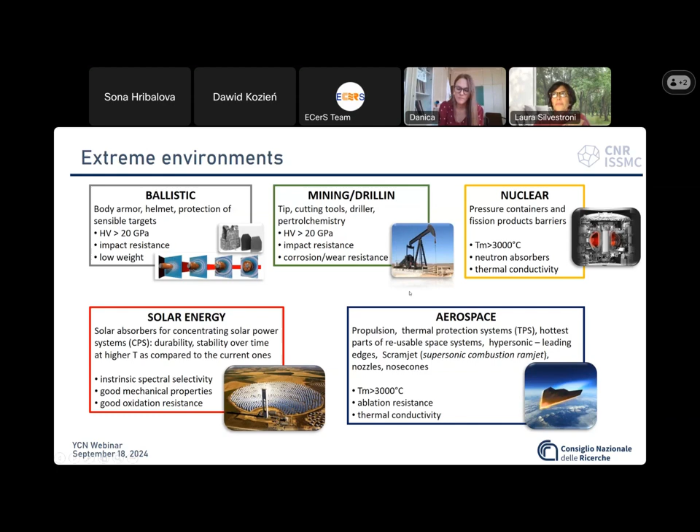In material science, a detailed study of the microstructural characteristics from the micro down to the nanoscale level is fundamental for identifying particular features deriving from processing, which are responsible for the specific thermomechanical behavior we will see in the final component.

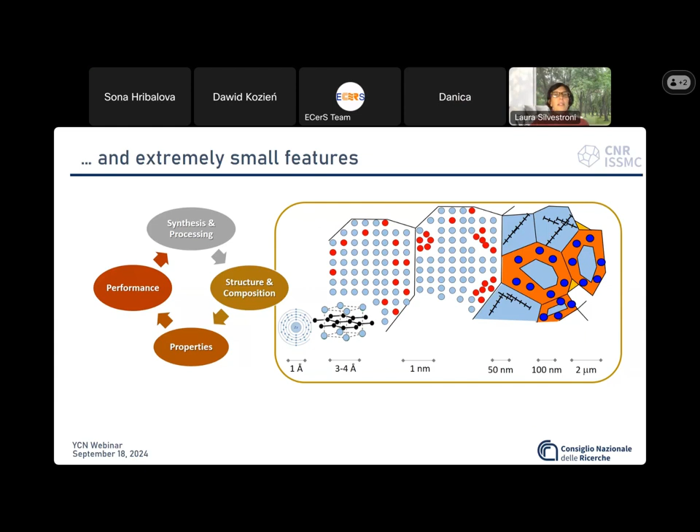Only with an overall understanding of the microstructural evolution and behavior under extreme environment can we take corrective actions and progressively ameliorate material performance beyond the current state of the art.

Today I will present some materials, narrowing down to the severe environment connected to aerospace. The family of materials known as ultra-high temperature ceramics, UHTC, is the most suitable candidate.

Starting with densification: borides and carbides have strong covalent bonds, and therefore require sintering temperatures above 2000 degrees C, application of mechanical pressure, and even current.

It is difficult to densify such pure borides and carbides without any sintering additive and control the microstructure so as to obtain good performance. Furthermore, it is difficult to machine such strong materials.

During my master's and PhD, I worked on borides and carbides with addition of molybdenum disilicide. At the beginning I started with hafnium diboride, then by mistake I took the wrong tap and opened the family to zirconium diboride, zirconium carbide, and hafnium carbide. So sometimes a mistake just broadens your work plan.

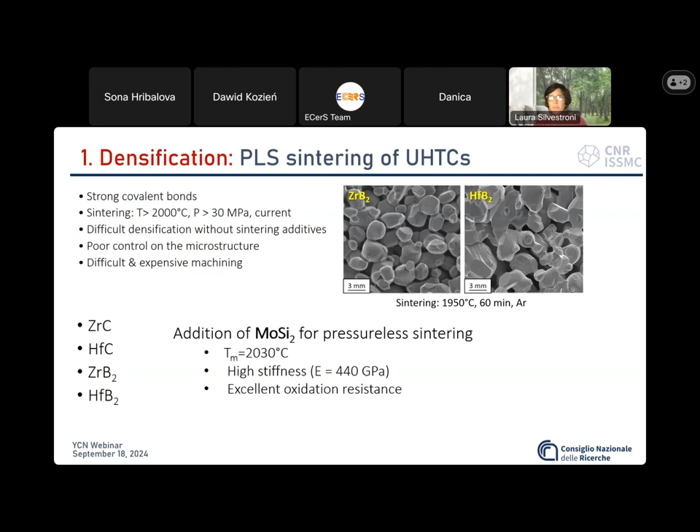So why did we add molybdenum disilicide? Our goal was to enable densification without application of pressure, so that we could produce near-net shaped components by pressureless sintering. Molybdenum disilicide has a high melting point, high stiffness, and excellent oxidation resistance.

These are examples of the microstructures of zirconium carbide or hafnium carbide with molybdenum disilicide that were sintered in flowing argon at 1950 degrees C, and we performed a very thorough microstructural characterization.

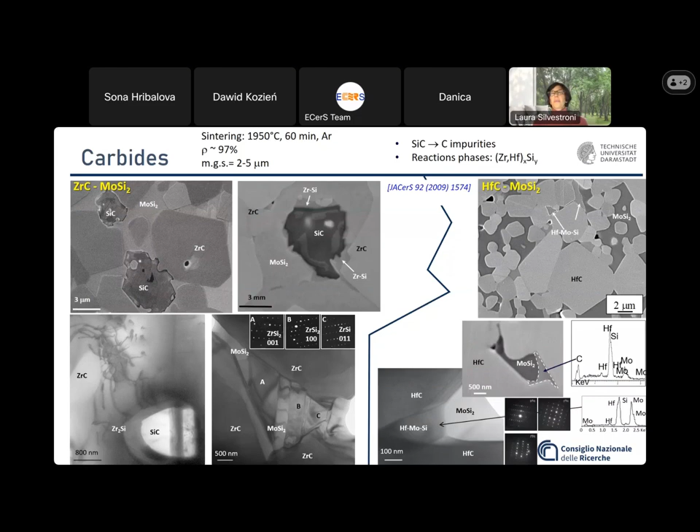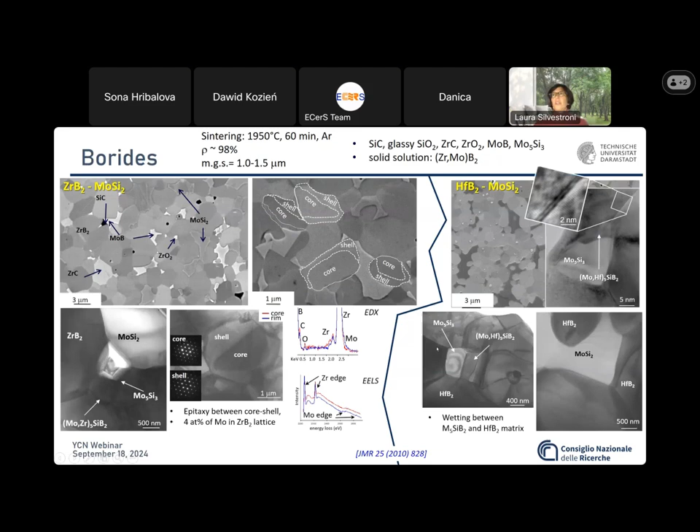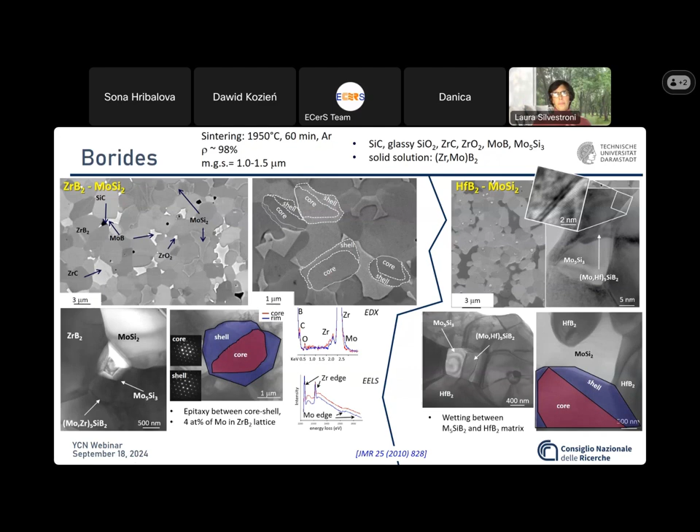We did the same on the borides, and here for the first time we identified a core-shell structure, a particular morphology of the grains, where the core is the original boride, zirconium diboride, and the shell is a solid solution that grows around the core and contains the additional element we added with the sintering additive, molybdenum in this case.

So to promote densification, the baseline is to use fine starting particles, not too fine because otherwise we introduce too much oxygen, but not too coarse so that matter transfer mechanisms are enhanced.

Using the strategy of the transient liquid phase is a good option because at sintering temperature we have a liquid phase that cleans the surface oxide, which hinders densification of borides and carbides, and acts as a grain lubricant. Having poor wettability of the transient liquid phase toward the matrix is also desired because it helps grain rearrangement, but it leaves clean grain boundaries and doesn't negatively impact mechanical properties at high temperature.

Our selection fell on molybdenum disilicide because it has a brittle-to-ductile transition, which is ductile and fills the voids due to its plasticity, and it also has some solubility within the matrix, so that we could form core-shell structures and hierarchical microstructure, which you will see in the next slides.

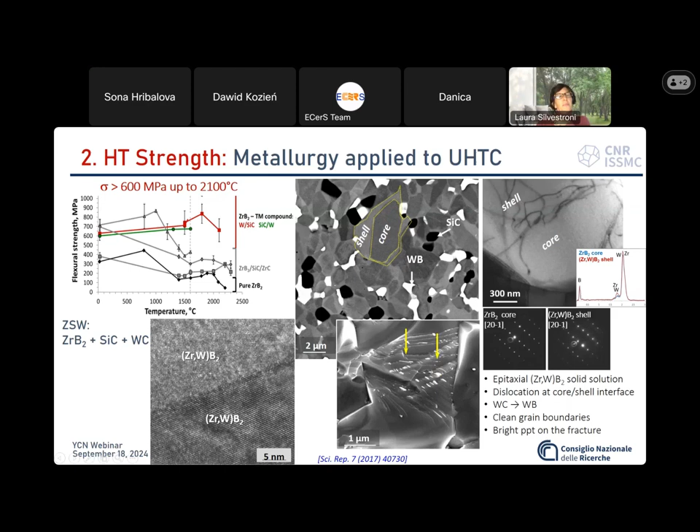To get further into this, I did some TEM analysis on the broken bars from the high temperature strength test, and you can see intense dislocation activity in the boride grains that formed real tangles of dislocations. These intersect and interact with each other, forming polygonized dislocation walls, which actually led to grain refinement from the original micron size down to the nanoscale.

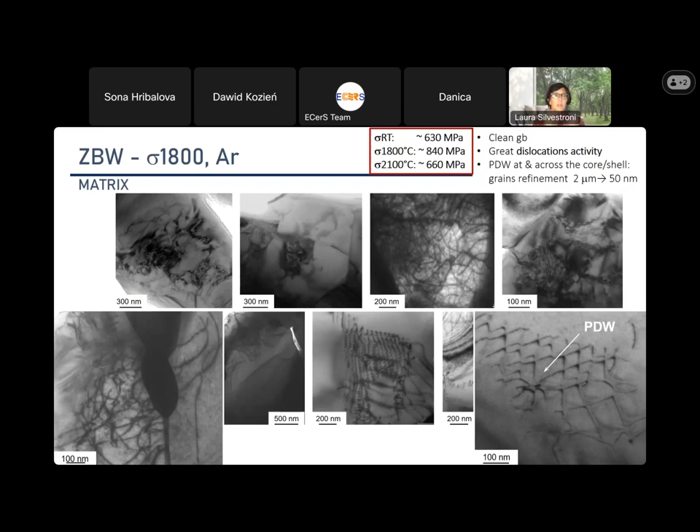Then I checked the second phases, and both silicon carbide and tungsten carbide displayed stacking faults, which are beneficial for crack deflection.

If you look at these silicon carbide particles, you can see that when the crack crosses the line defects, crack deviation occurs, whereas when the crack meets the defect along its longitudinal direction, it proceeds straight without any deflection.

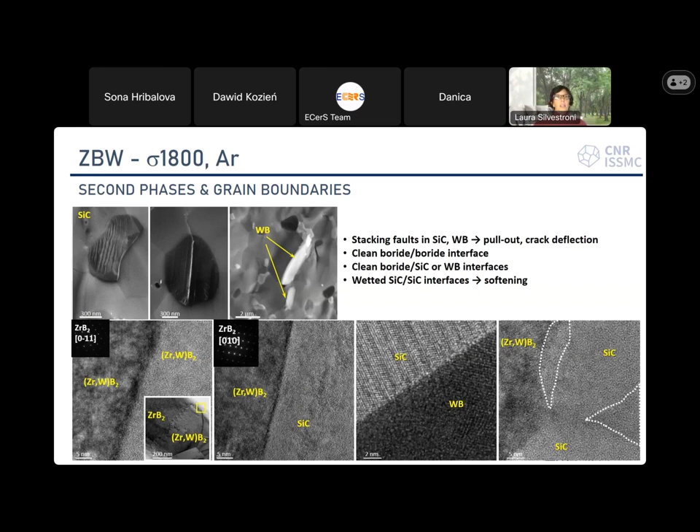The grain junctions remained clean, like in the as-sintered material, except when we had two adjacent silicon carbide grains in this region, where we observed some glass between the two. So the choice of adding just a little bit of silicon carbide was good in avoiding creep at high temperature.

I went back to the microscope, this time on an annealed sample of the same composition, but just thermally treated to boost the phenomena that were slightly highlighted in the sintered material, and to better evidence what was responsible.

On the polished surface, we found that the core shell was preserved, but just the core was reduced and the shell region was enlarged. There was coalescence of silicon carbide grains, and again, the bright precipitate.

By TEM, we were finally able to label these precipitates as metallic tungsten, from which the dislocations departed. So we had some nano-metallic particles inside a micron-sized boride grain.

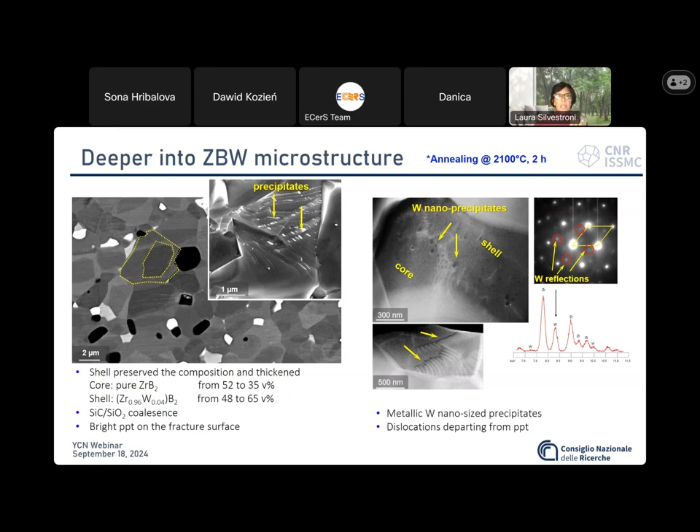To justify the strengthening at ultra-high temperature, we considered Griffith's equation and the attributes that might have changed during the test, either acting on the toughness or on the flaw size, which is actually related to the grain size.

We collected a series of positive factors, starting from the refractoriness of the matrix, of course, with the small grain size, which did not increase, but actually refined upon loading by dislocation intersection. The grain boundaries were clean, thanks to the choice of tungsten carbide as additive, which cleaned all oxides.

Then we considered another hypothesis related to the formation of a healing outermost glassy layer at high temperature. But actually the tests were done in argon, and so no glass was formed. So this factor was discarded.

Then we had a hierarchical microstructure with nano-sized tungsten particles acting as reinforcing phases. This tungsten was ductile at the testing temperature and locally toughened the material.

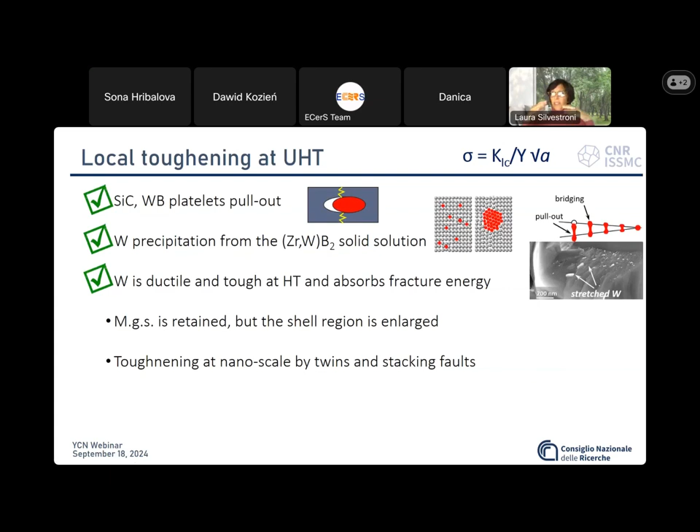We also hypothesized local toughening occurring at ultra-high temperature, including silicon carbide and tungsten boride platelet pull-out. We had tungsten precipitation from the shell solid solution, and this rejected tungsten is ductile and extremely tough at high temperature, so it could absorb fracture energy.

We also considered the mean grain size, which was retained during the test up to 2100 degrees C, but actually the shell region enlarged. So a larger volume fraction of material was actually reinforced by these precipitates, and the similar toughening at nanoscale in the shell was amplified.

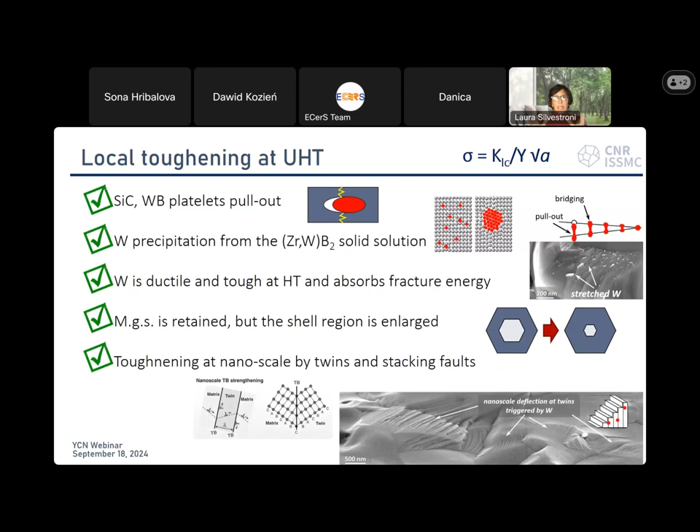Here I collect all data available up to the ultra-high temperature regime, which is commonly defined at 1600 degrees C. Here is a dotted line showing the boundary of 300 megapascals, which is considered reasonable for structural applications in the aerospace sector.

In gray and black, I reported data from mostly pure zirconium diboride obtained from the Air Force labs in the 70s and more recently from the MS&T group. Both of them were featured by a quite large grain size range, from 5 to 20 microns, and as such the strength was not exceptional, not exceeding 400 megapascal, and decreasing to 150 megapascal.

We prepared another material in blue, where the second phase was completely consumed during the thermal treatment, but still had a finer grain size, resulting in a constant strength here in blue around 400 megapascal from room temperature up to 1800 degrees C.

Another interesting result was obtained for our hafnium diboride based system, shown in orange and red. The orange is the as-sintered and the red one is the annealed.

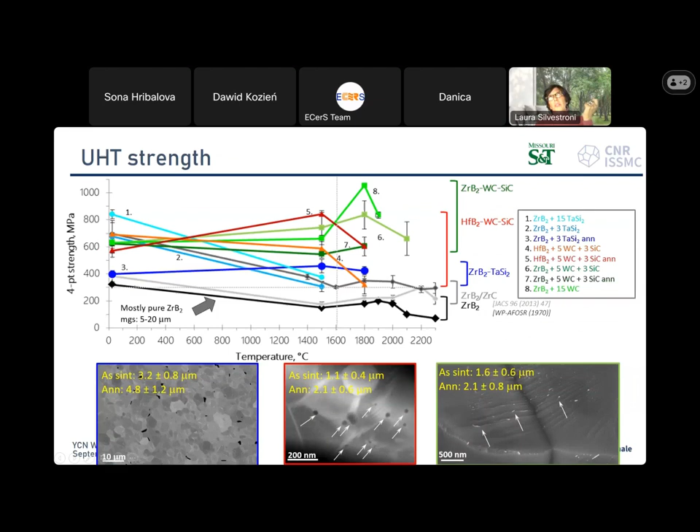The highest strength was found for this fluorescent green here, belonging to a zirconium diboride material where the addition of tungsten carbide was increased to 15 volume percent. This composition resulted in an unprecedented strength of 1 gigapascal at 1800 centigrade, that remained over 850 up to 1900 degrees C.

Moving beyond this temperature, the ceramic underwent plastic deformation that we attribute to the ductility of the dispersed tungsten boride phase and the approach of the eutectic temperature. Anyway, we didn't have a brittle failure.

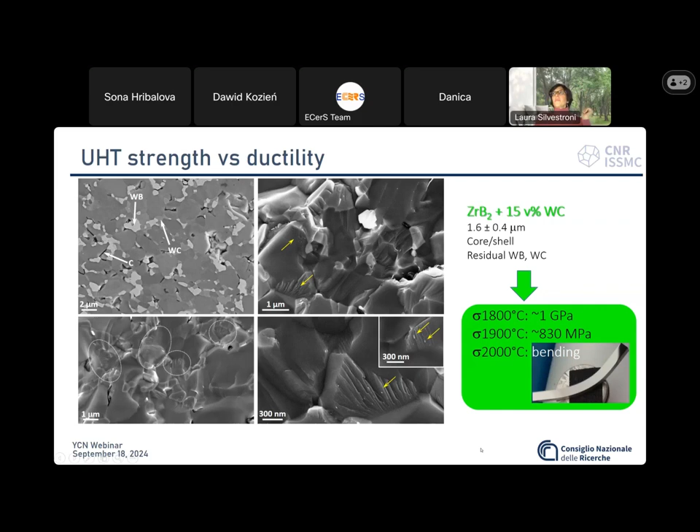Another interesting aspect which we found working on several systems containing zirconium diboride and tungsten, molybdenum, or tantalum, is that depending on the system, on the transition metal, we observe precipitation of inclusions of different chemistry, borides, metal, carbide, and shape. We suppose this factor to be related to the local partial pressure within the furnace.

One question that we still have in mind and haven't answered yet is the possibility to tune the chemistry of the precipitates, in the form of metal borides or carbides, by manipulating, by using different furnaces, by changing the sintering environment. We still don't know if it's possible or not.

We also wondered if having core-shell grains made of complete solid solution, like eliminating the core, would be more beneficial than the core-shell structure. But the answer is no, since the elimination of the core and the formation of a homogeneous shell would mean the elimination of one discontinuity - the dislocation walls present at the core-shell interface. Actually, these linear faults are conducive to grain refinement and increased plasticity upon testing at elevated temperature.

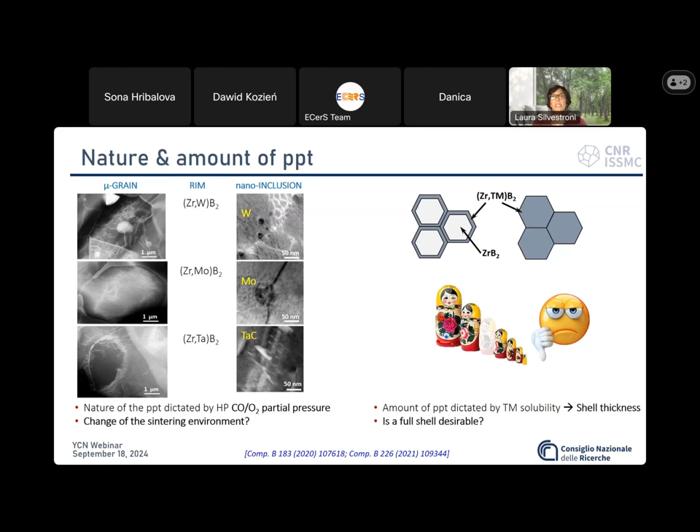So, the key factor for super strong ceramics in the ultra high temperature regimes is microstructure heterogeneities spanning from length scales from the micro - second phase, grain cores - to the nano, which include solid solutions in the shell, dislocations, and precipitates. These features interact during formation, and this might have the potential to achieve superior properties and temper the strength-ductility paradox in the ultra high temperature regimes.

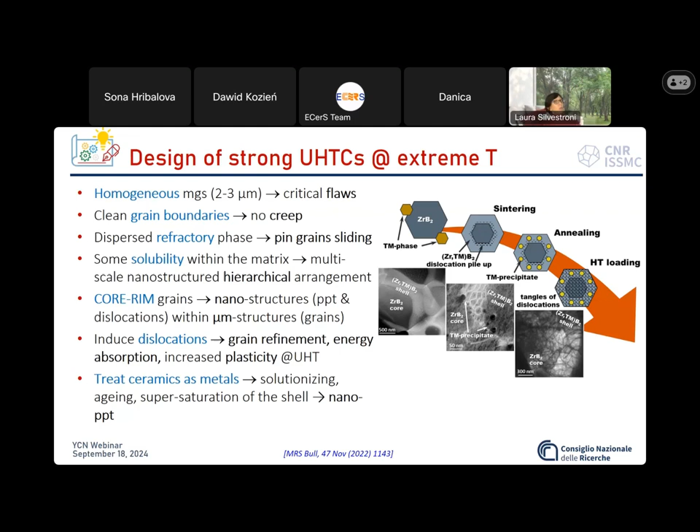Let's move now to the oxidation of zirconium diboride, which is again quite a complex topic. Zirconium diboride alone doesn't really work because it forms boron oxide, which is volatile at too low a temperature for such materials. At higher temperature, it leaves just a naked porous zirconium oxide skeleton, which is not really sufficient.

The addition of silicon carbide prolonged a little bit the lifetime of the zirconium diboride, but still, as we move above 1700 degrees C, we start having problems of active oxidation in the subsurface, and again, we don't achieve the 2200 degrees that could possibly be needed in hypersonic applications.

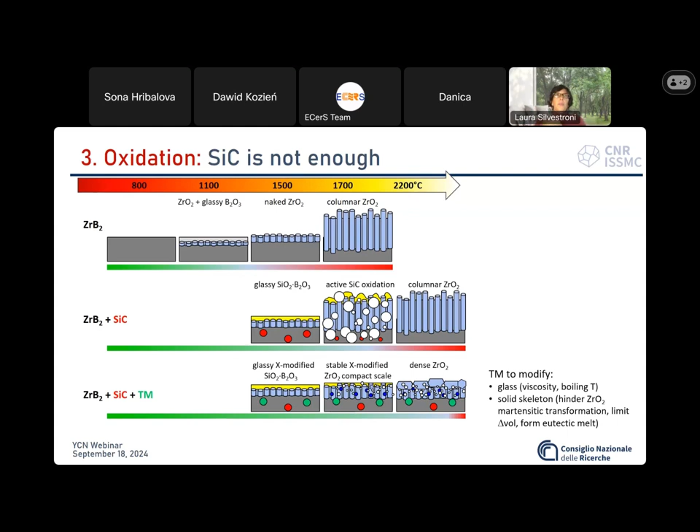Therefore, we decided to add some transition metal to modify the glass viscosity, boiling temperature, and saturation. The transition metal could also modify the solid skeleton, the zirconium oxide, hindering the martensitic transformation, limiting the expansion of volume, and forming a eutectic melt that could melt and possibly slow down the oxygen penetration within the core.

So here you can see how the addition of a transition metal strongly impacts the oxidation behavior. Here we have zirconium diboride additivated with zirconium, molybdenum, tantalum, or tungsten silicide, and oxidized at 1200, 1350, 1500, and 1650 degrees.

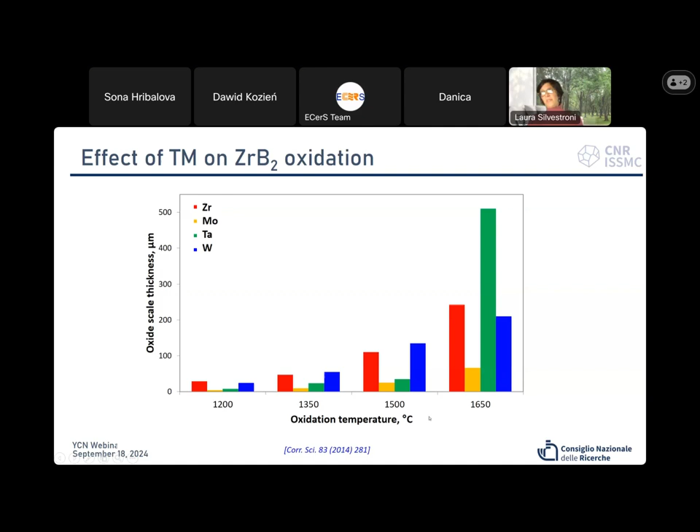You can see here that what works really well up to 1500 degrees C is not really optimal if you increase the oxidation temperature a little bit. This is related to the intergranular phases.

So I would just concentrate on this most striking example with tantalum. Here in the cross section, we can appreciate a very complex microstructural architecture at 1500 and 1650 degrees C. Without entering into details, we have a mixture of molten glass, solid phases, polytypic transformation, dissolution and reprecipitation. Many things are happening here.

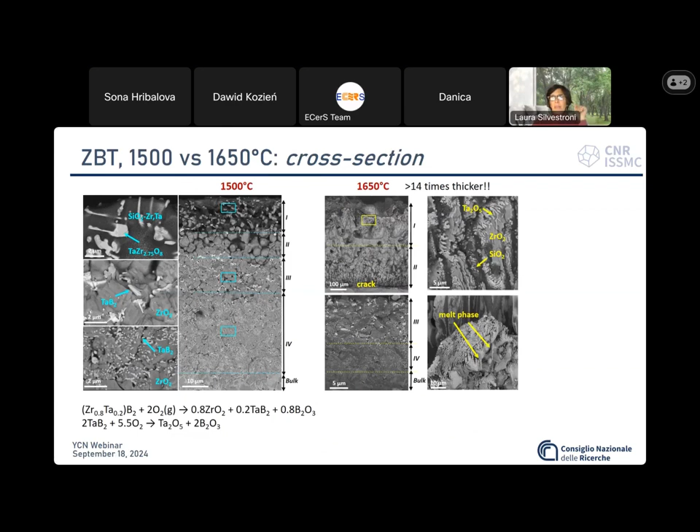But if we go farther deeper, checking each layer by TEM with a lot of patience and luck, you can recognize in this structure our core shell structure.

So actually zirconium diboride oxidized into zirconia, and our tantalum nano-inclusion reacted with the boron oxide released by the matrix and formed tantalum diboride. So far so good. By oxidation we form a boride, good.

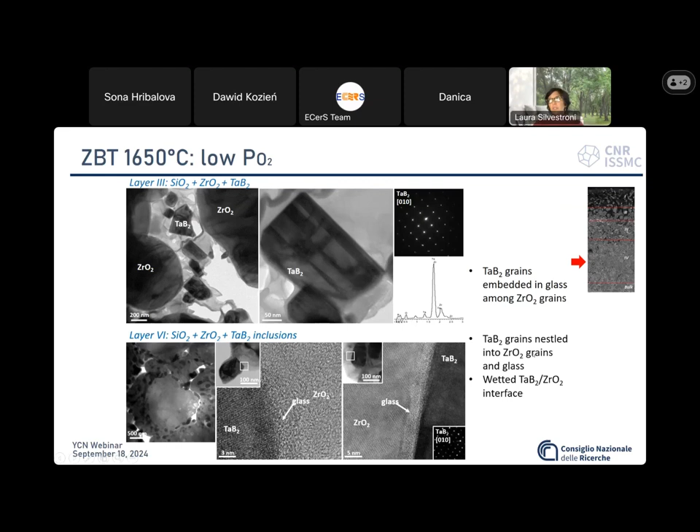But the problem is that until we are at low oxygen partial pressure in the subscale, these tantalum diboride particles are protected and very effective. However, as the oxidation becomes more aggressive, reaching more oxygen or increasing the temperature, tantalum diboride oxidation occurs and forms tantala, which is beautiful from a microstructural point of view, but it's accompanied by a very large volume expansion that destroys the zirconia skeleton. So in an extreme simplification, this is how the core shell evolves upon oxidation.

So zirconium diboride is the compound that most favorably oxidizes, and its oxidation protects the particles which remain nestled inside. Then, depending on the system, the particle evolves as boride or remains as metal.

And in turn, we might have problems or not if the oxidizing species at the testing temperature is solid and might have some volume expansion, or liquid, in which case it could fill the voids, or vapor, in which case it would create bubbles and leave the system.

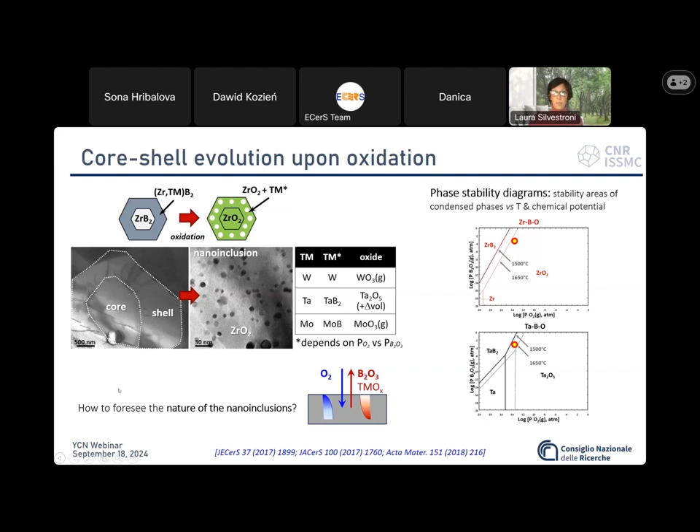One way to foresee what phase I will have in my oxidized shell is to use the phase stability diagrams, which look more or less like these, and they plot the stability areas of condensed phases versus temperature and the chemical potential. You can decide the temperature that you want to test, and you can see that at the same boron oxide and oxygen partial pressure, in one case we have zirconia, whereas in the other case we have tantalum diboride or tantala if we increase the temperature, and this fitted very well with our experimental finding.

So to make our UHTC more oxidation resistant, we first need a little bit of silica former phase, so to create an initial glass healing, but not too much, otherwise we will have other troubles.

We should have a homogeneous distribution of the second phase, so having a complete solid solution is actually beneficial for the oxidation. The capability to condense as boride in subscale is also favorable because you slow down the oxidation, but the nature of the phase that forms depends on the gradient partial pressure.

We should try to look for high stability field in the region of the highest oxygen partial pressure, and one of the candidates is rhenium, but it's not really economically affordable.

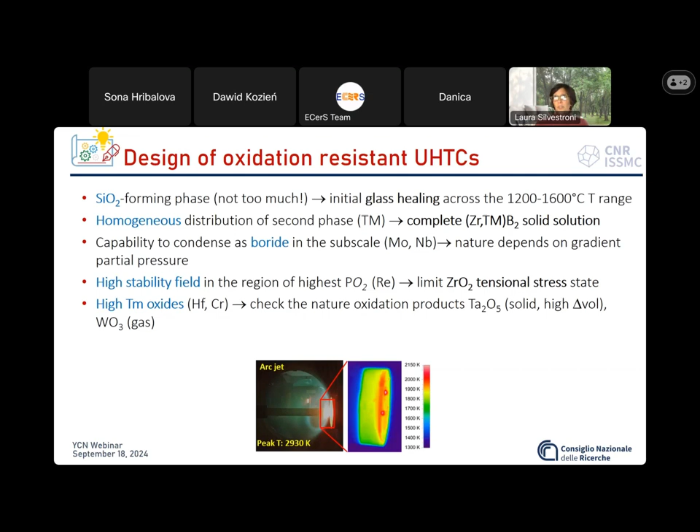Because if we don't have large expansion at the intergranular phases of zirconium oxide, we would limit the tensional stress and the architecture destruction. So we have another problem: fracture toughness.

In an attempt to mitigate the poor failure tolerance of UHTCs, research on a new class of materials that merges UHTC and matrix and CMC, ceramic matrix composites, has been recently launched and is called UHTCMC.

Looking at the fiber portfolio, there is a jungle. You can vary the length, continuous or short, milled, less milled, the composition, silicon carbide, carbon, the crystallinity, add a coating, without a coating, and it's really a large playground.

And it's very possible that before measuring a considerable fracture toughness increase, you will have to pay attention to several factors. First of all is the sintering temperature, which is dictated by the sintering additive.

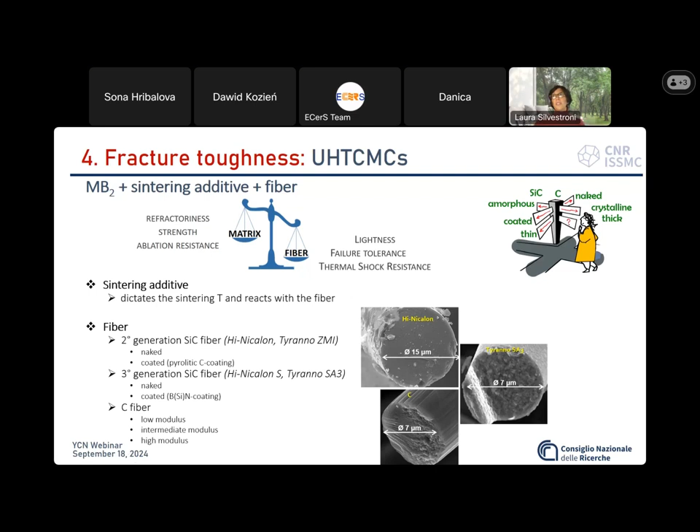This will create some troubles with the fibers, which you find in several generations, more or less crystallized. And every generation, every type of fiber, also carbon fiber, has a different reactivity. So it's not really straightforward.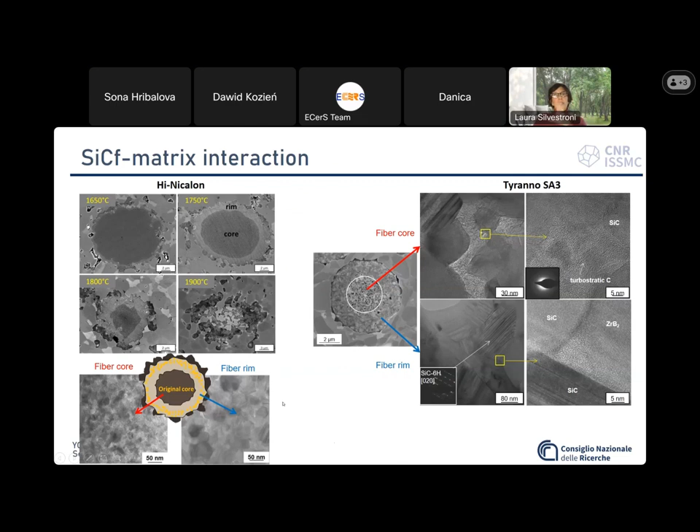Here you can see some examples of the interaction between silicon carbide fibers of second generation, the Hi-Nicalon, and the third generation Tyranno SA3, with the same matrix, and you can see how these fibers progressively deteriorate with increasing sintering temperature. So it is a bargain between the matrix densification and the fiber degeneration.

So the path from the raw fiber to the fiber in the sintered composite passes through some fundamental phenomena that derive from the fiber composition.

And for example, in the case of silicon carbide, this includes silicon oxycarbide softening, which is included in the raw fiber, carbon migration outwards, silicon carbide crystallite coarsening, and then we have, of course, cleaning of the boride particles and formation of silicon carbide platelets well anchored to the matrix.

A similar trend is observed on the carbon fibers, where the extent of the interaction is defined by the production process of the raw fibers—that is, whether they derive from PAN-based or pitch-based precursors.

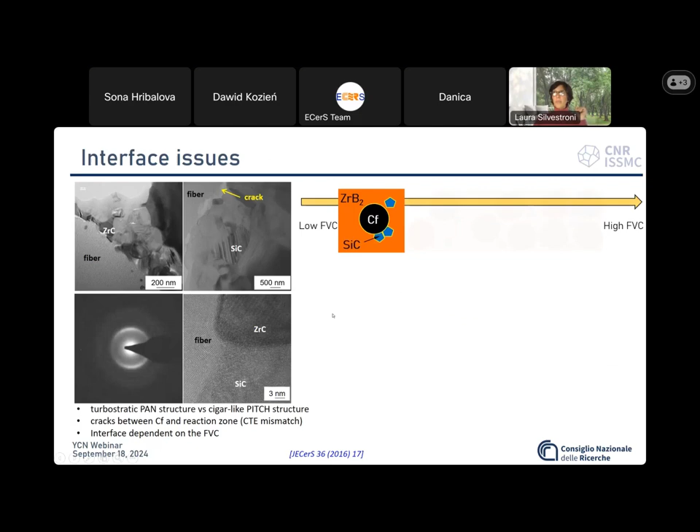Furthermore, beside this general interaction, we have noticed that beside the additive, the strength of the interface domain between fiber and matrix varies depending on the fiber volume fraction. We have stronger interaction for low fiber content and weaker interaction for high fiber content.

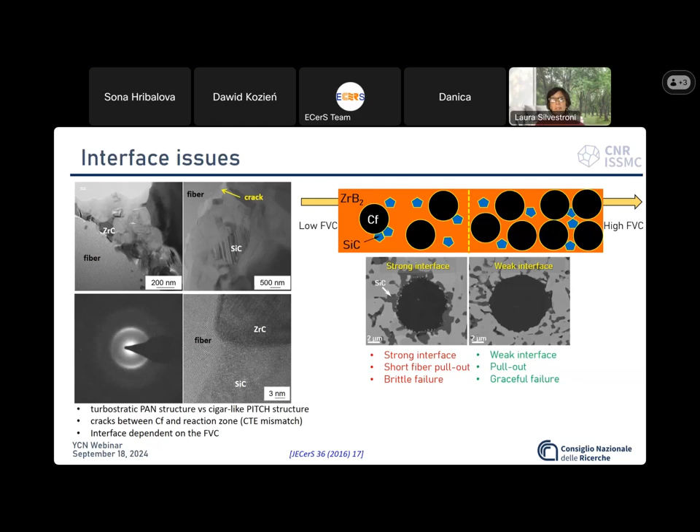In addition, the fiber, either silicon carbide or carbon, oxidizes preferentially compared to the boride refractory matrix. So to address the simultaneous issues of fiber degradation by interaction with the additive, efficacy of the fiber on the mechanical properties, and preferential oxidation, we have a smart and relatively simple approach: the functionally graded concept, where we can design a UHTC-rich outermost layer that protects from ablation, and a progressively fiber-rich core that provides failure tolerance and thermal shock resistance.

Besides making the composite overall much lighter. But of course, we have to take care to prevent fiber deterioration upon excessive interaction with the additive.

So we need to find the right one, and we can change the sintering additive across the thickness of the composite. Then we have to couple layers of different composition and thickness that can induce cracking instead of increasing toughness. And this is also something that must be considered.

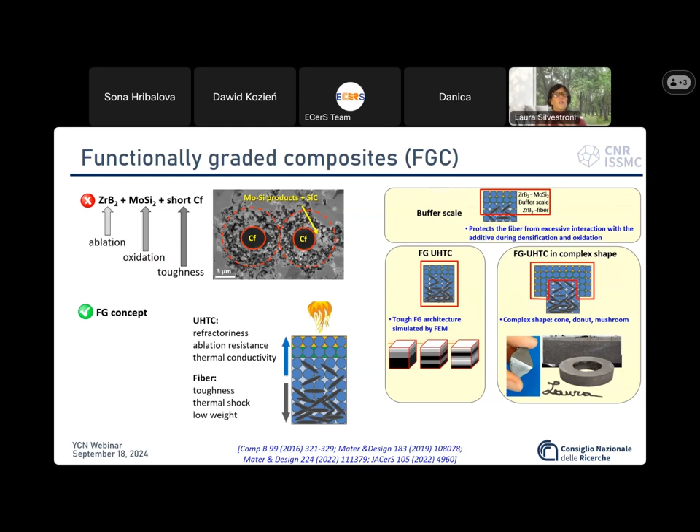And of course, we have to create our component, and manufacturing is also an issue. But this can be done by several methods that include dry pressing of the various powder fiber mixtures, or slip casting, or even 3D printing.

So a new star is born: the UHTCMC class of material, which enables a very broad variability of architectures, with fiber alignment into random, 2D, 1D, and so on. Functionally graded materials are, I think, a valid approach to make a compromise on our material processing. But of course, the blanket is always a bit too short, and there is a series of careful considerations that must be taken into account.

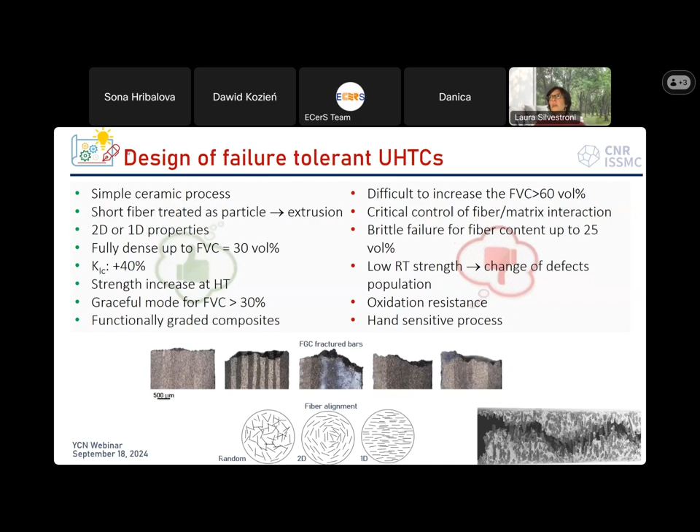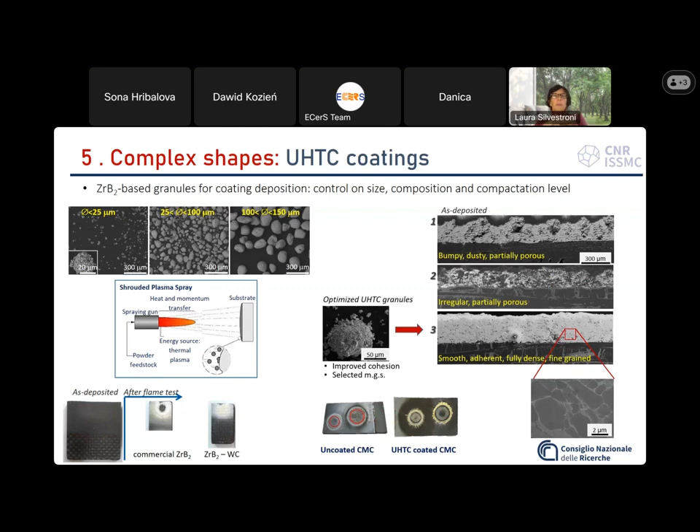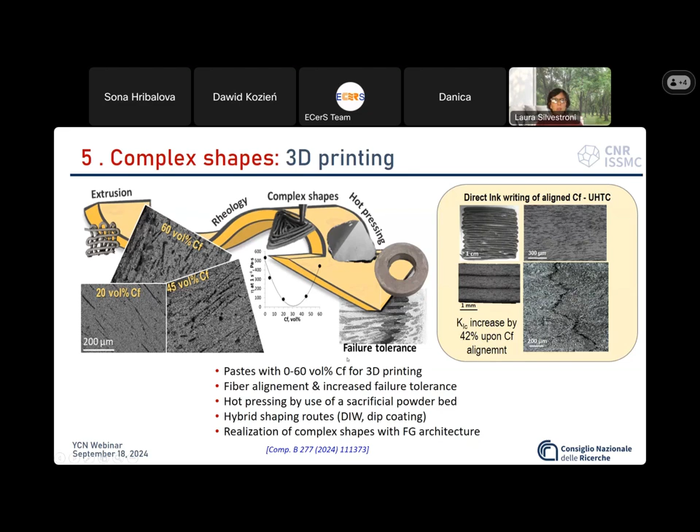So the key aspect essential in the development of complex shapes and complex architecture is the coupling of an experimental part with a simulation one, which can predict the stress states at the various interfaces and estimate the toughening degree.

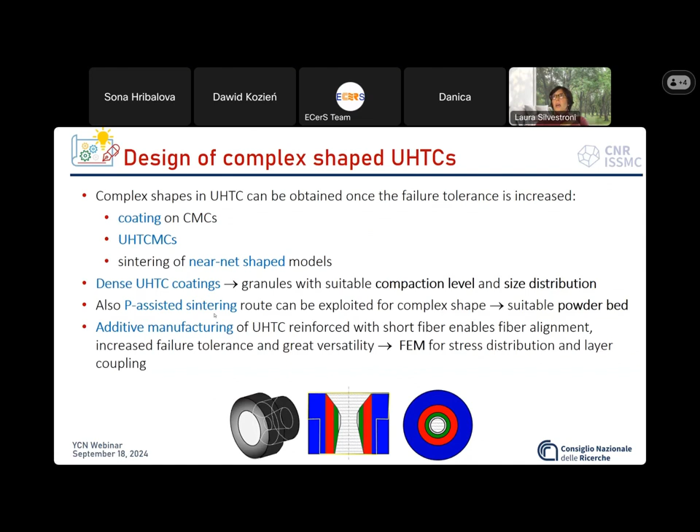So what you should keep in mind after this whirlwind trip through UHTC issues and patches is that good work is better than bad work, which is quite obvious. So take your time, think twice, and operate cautiously.

However, bad work is also a good result and can teach a lot. So pay attention also to bad works.

Then, patience and endurance pay back. So for example, I couldn't have good TEM pictures and good stories to tell you if I hadn't spent a lot of time preparing good samples. Then of course there are other factors that play a role, but I will not enter into detail.

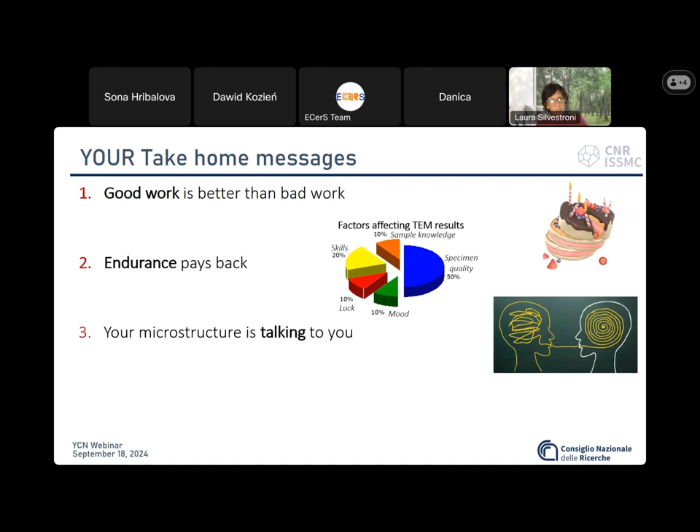Then, your materials contain all the information that enables you to ameliorate their performance. So spend time studying the microstructure, talk to them, try to understand what they want to tell you.

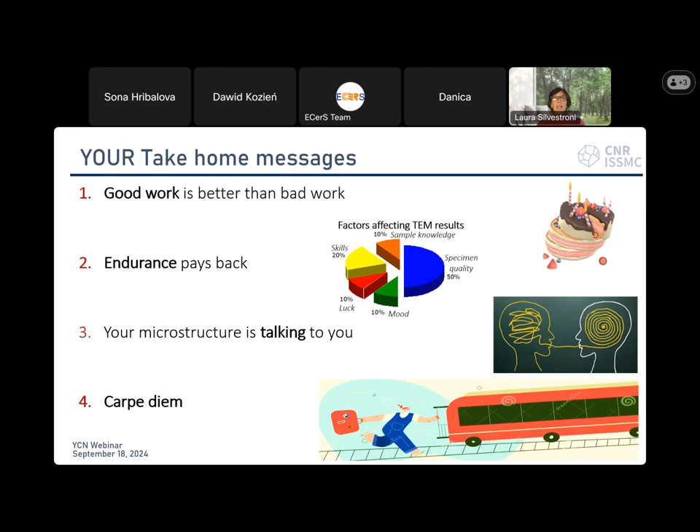And at last, catch the train—as many as you can—because they might pass just once and could be pivotal in your career and private life too. Now I would like to acknowledge

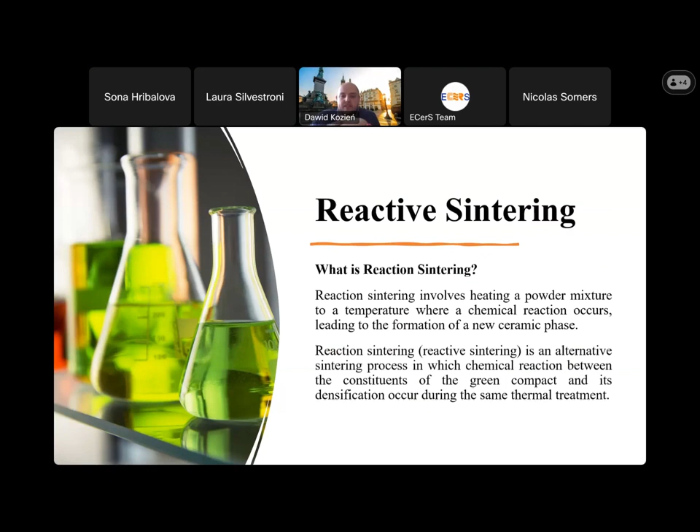Why do I speak about reactive sintering? What is reactive sintering? We have a lot of definitions. For me, the best one is that reactive sintering is an alternative sintering process in which a chemical reaction between the constituents of the green compact and its densification occur during the same thermal treatment.

As for types of reactive sintering, we have solid state reaction, which involves reaction between solid powders to form a new solid ceramic phase, liquid phase sintering, and gas phase reaction.

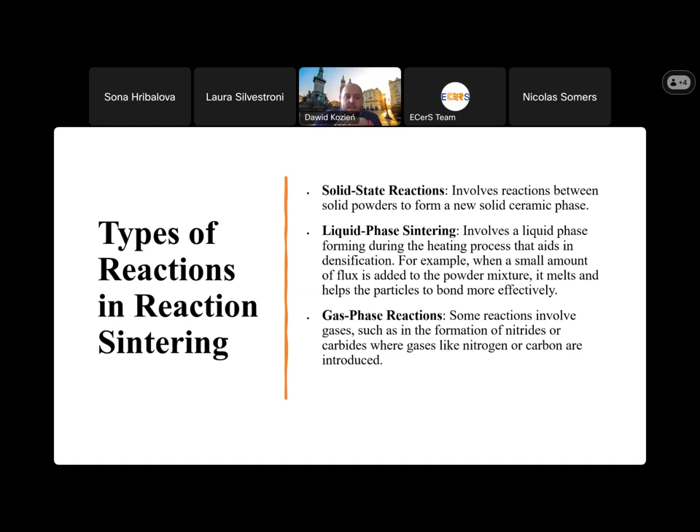Some advantages: everybody agrees that high purity could be an advantage of reactive sintering, controlled microstructure, and as Laura said a lot about microstructure, and enhanced properties.

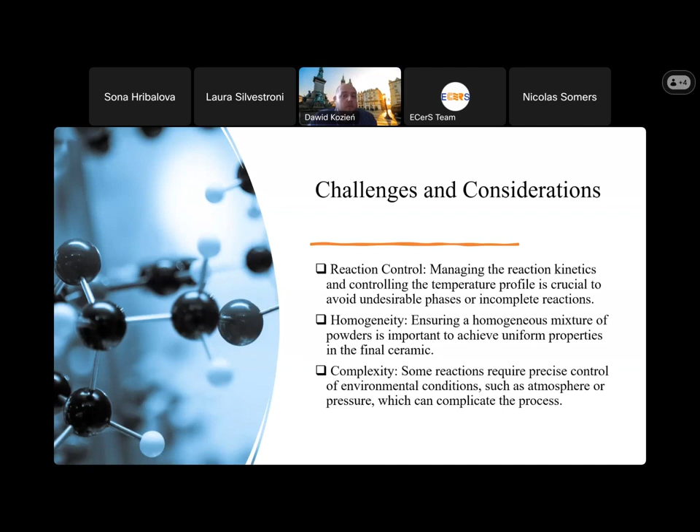But there are some challenges too. Reaction control, managing the reaction kinetics and controlling the temperature profile is crucial to avoid undesirable phases or incomplete reaction. That's the crucial thing when choosing this method or this reaction during sintering. Homogeneity and complexity could be a problem as well.

Now some introduction on why we are working on this. It's very similar to Laura's presentation. We are working on ultra-high temperature ceramic materials because they have properties between metal-like and ceramic, and we chose two groups to sinter: borides and carbides.

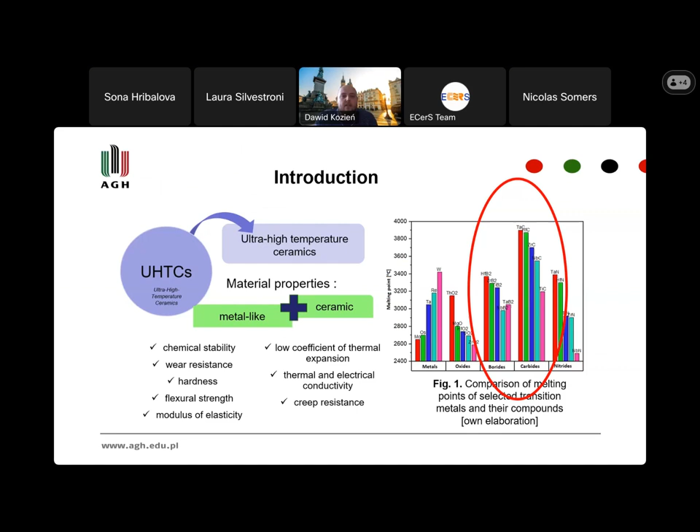It was easier for us because during my PhD I worked on boron carbide. Some advantages of these borides as ultra-high temperature ceramic materials are high thermal conductivity, high hardness, and the formation of a layer of boric acid that helps during sintering.

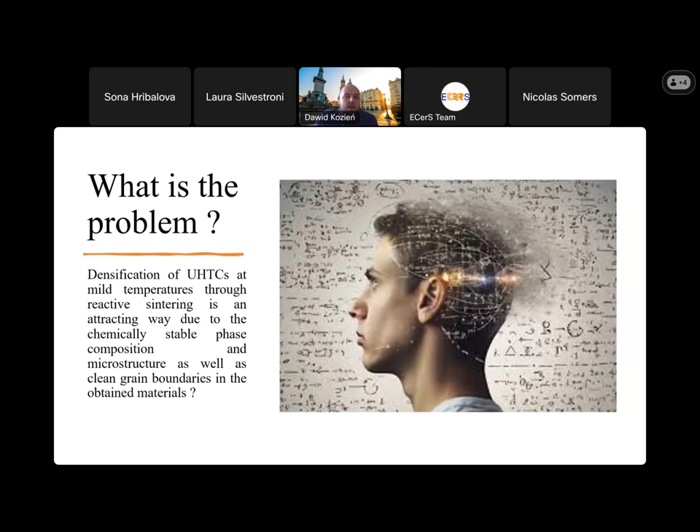Everybody can ask, what is the problem? The problem is densification, and achieving it at mild temperature through reactive sintering is attractive due to chemically stable phase composition and microstructure, as well as clean grain boundaries in the obtained material.

So I started that during my PhD. I began working on synthesizing nanopowders of boron carbide that could be used as a raw material in sintering. We have prepared this, and now we have a European patent on how we produce this very fine grain boron carbide.

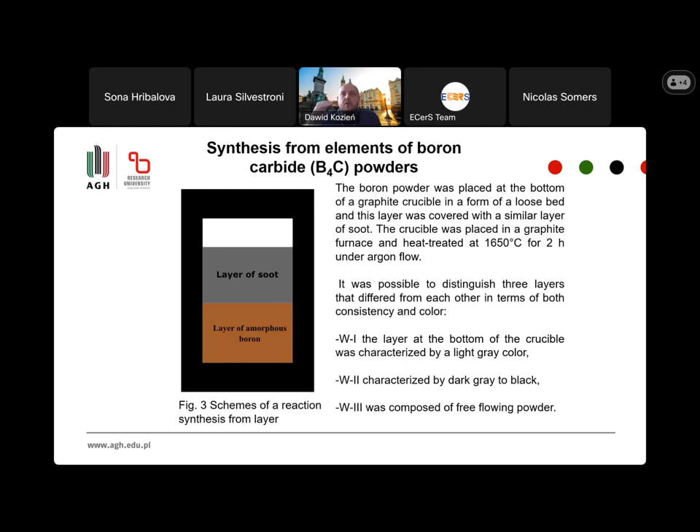This is specific to how we prepare it, based on having a layer of amorphous boron and on top of it a layer of soot. This way we can separate out a very pure powder.

You can see that after sintering, we have a powder with only 1% less purity than graphite in this composition. After that, we checked this on the synchrotron Solaris line.

Maybe some advertisement for young ceramics researchers: this is available for you for free across the whole of Europe. Everybody can apply for time on this line, and you can even get support to come to Krakow to do your measurements.

From this research, we found that every boron carbide that was synthesized by us, or bought commercially from another supplier, has a very thin layer of boron oxide - maybe this will be visible here. This layer is very important because it gives a liquid phase during sintering, and you can manage the reactive sintering using that liquid phase.

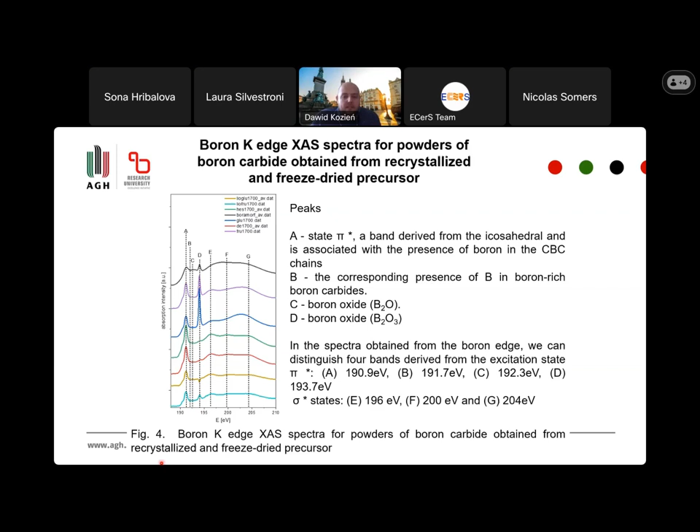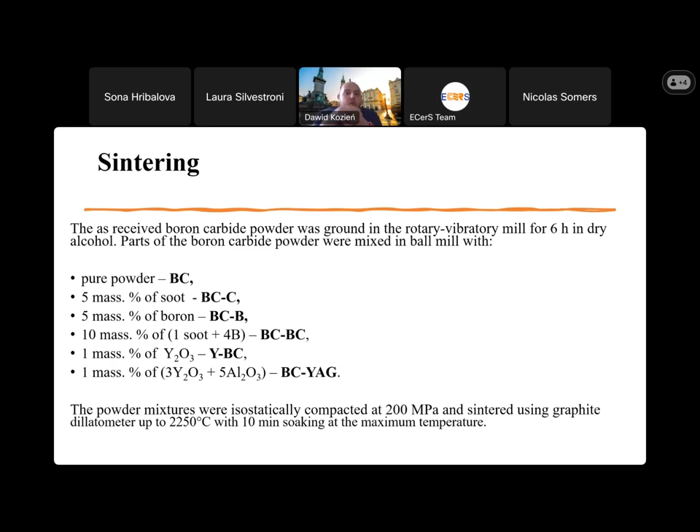We started to assume that what we need to do is add something for better sintering, specifically non-reactive boron carbide that has more boron or carbon in the structure for better sintering. So we add carbon, boron, to obtain more boron carbide, yttrium oxide, and aluminium oxide with yttrium oxide to obtain garnet.

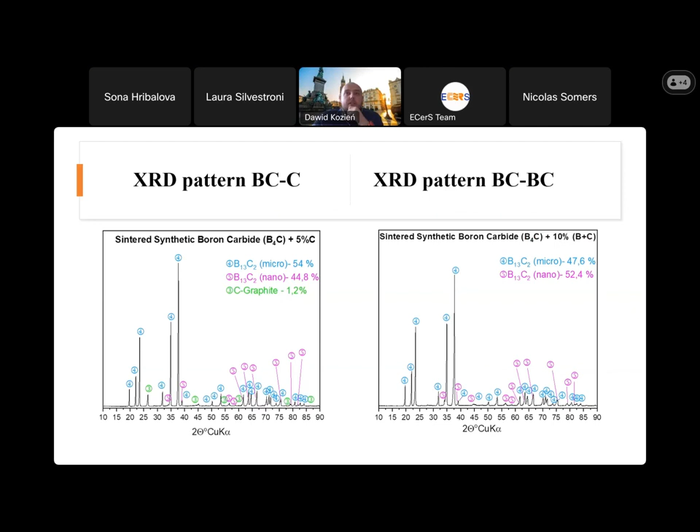After that we sinter. Of course we have different sintering temperatures - some additives give the lowest temperature, some grow the synthesis temperature. But what's important is that carbon doesn't want to go into the structure of the boron carbide. This was very problematic, and the problem was that during sintering we had a graphite structure forming, which is the weakness of the composite structure.

The same problem occurred with the YAG, and we obtained similar results - this image strongly depends on the microstructure of sintered bodies, on the chemical and phase composition of the powders. Sintering was very problematic, maybe not as good as we assumed, but we still have some results to think about for next steps.

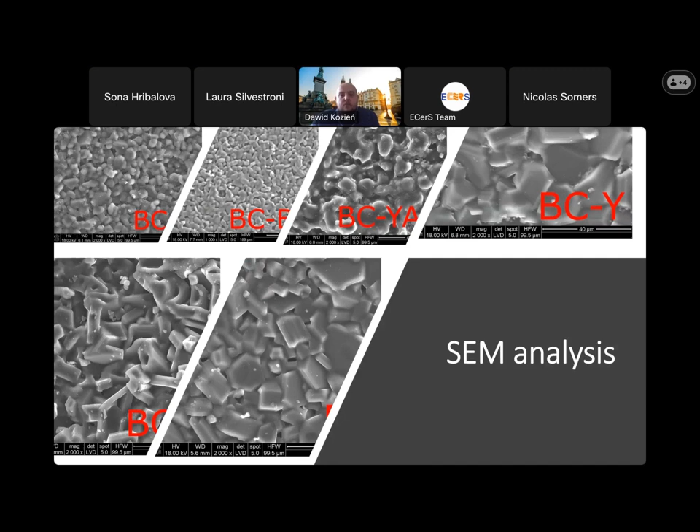To sum up this time during my PhD: the density of the sintered material and their microstructure strongly depend on the additions used. It's obvious the obtained powder with additives sinters with high relative density, but the addition of carbon reluctantly builds into the boron carbide structure and weakens the mechanical strength of the composite.

So the next part covers the effect of additions on boron carbide sintering. Let us assume maybe we can change something - we can add titanium, boron, and titanium with boron. We get better density, assuming titanium will form titanium diboride. So we started the composition with commercial boron carbide with additions of 2.5, 5, 10, 15, and 20% of additives.

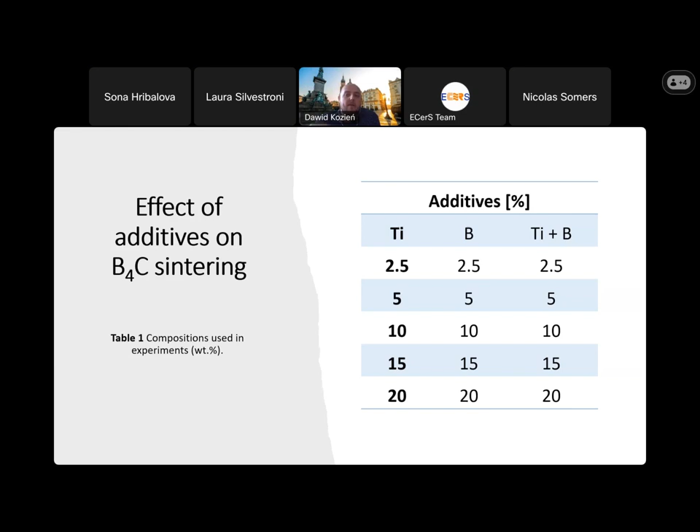After that we observed how the sintering temperature changed. The sintering process for commercial boron carbide began at 1675 Celsius degrees, as evidenced by the change in dimension. All percentages of titanium addition reduced the sintering temperature to 1600.

The rapid densification of the composite sintered between 1600 and 2000 Celsius degrees may stem from the axial mass transport between the solid phase and the formed eutectic liquid phase, which can fill the pores. So this was a good option because we can fill the pores during this liquid phase.

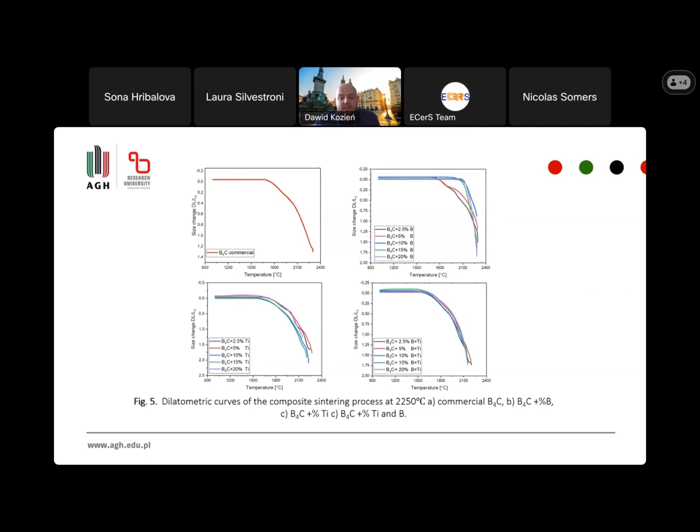The results obtained by our research group can be compared to boron carbide with titanium, but also silicon carbide, and similarly with hardness and other properties. So it's quite good because we didn't expect this. Maybe some interesting information: during addition of boron, we have the situation where the boron takes up the residual graphite that is obtained during sintering.

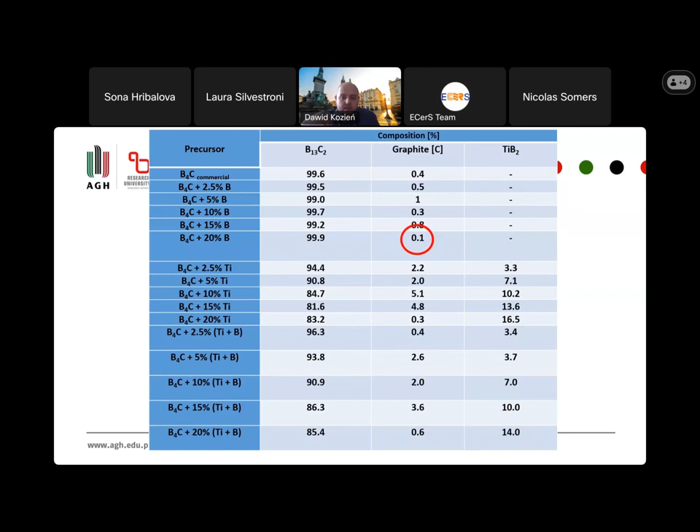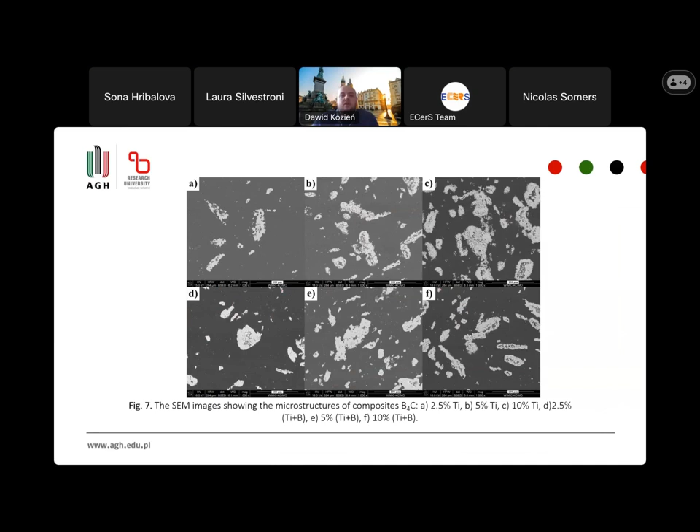So the boron can take the carbon into the structure, and we don't have free carbon in the composite that weakens the structure of the composite. We can see the table formation and some analysis. It looks quite good, and we say, okay, we have some results, very interesting.

By increasing the sinter temperature, the boron carbide stoichiometry converts from B4C to B13C2. The boron additives weaken the mechanical properties as they enter the structure of the boron carbide, while the applied titanium and titanium-boron additives with the sintering technique improve the mechanical properties of the obtained composite due to titanium diboride phase formation.

So next we have an article, and now the main focus, as Laura said, is that based on the results we obtained, we assumed we needed to change our point of view. Moving to the scope of the work: the aim of this research was to obtain composites based on boron carbide and intermetallic compounds from the Ti-B-Si system.

To achieve this goal, we used three different sintering methods: free sintering, hot pressing, and SPS spark plasma sintering. Thanks to many planned and performed tests, it was possible to assess how the sintering technology affects the properties of the material, the difference between the techniques, as well as how the amount and type of additive affect the final properties of the material.

For the starting, we use two composite systems using this. This system was titanium disilicide and titanium 5 silicon 3.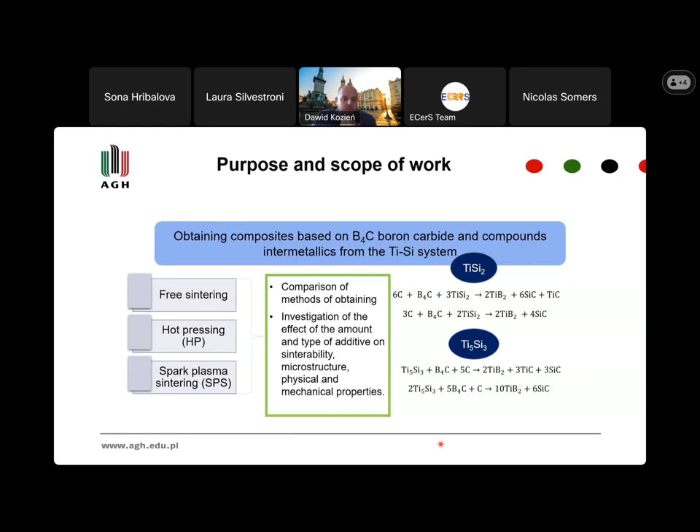After that, we prepare the samples, comparing the results with additives of this intermetallic at 5, 10, 15, and 20%. And what is most important in our research, we start with stoichiometric measurements, a stoichiometric sample.

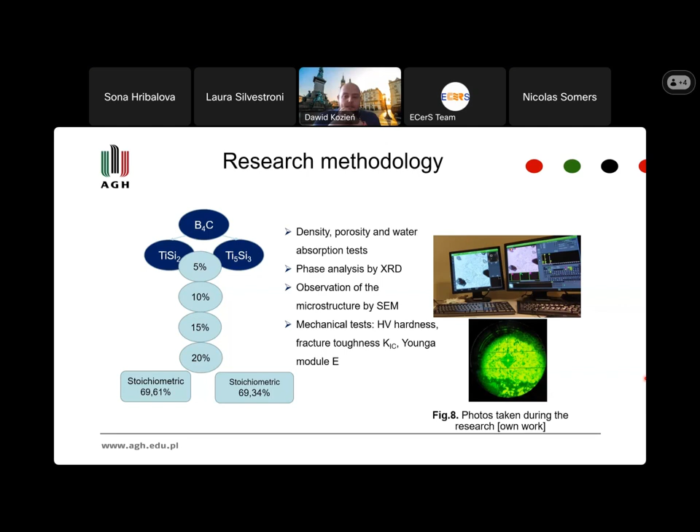The stoichiometric sample means that we assume that 100% of our raw material during the sintering will be changed into other phases. So in this method, we think it should look like this.

This reaction should not exist according to the information we obtained from a lot of articles, but it exists, as our results showed.

For energy reasons, the reaction is more favorable, leading to the formation of products such as titanium carbide, titanium diboride, and silicon carbide. But thus the expected products of reaction sintering in the mixture of starting powders are a composite consisting of these chemical compounds.

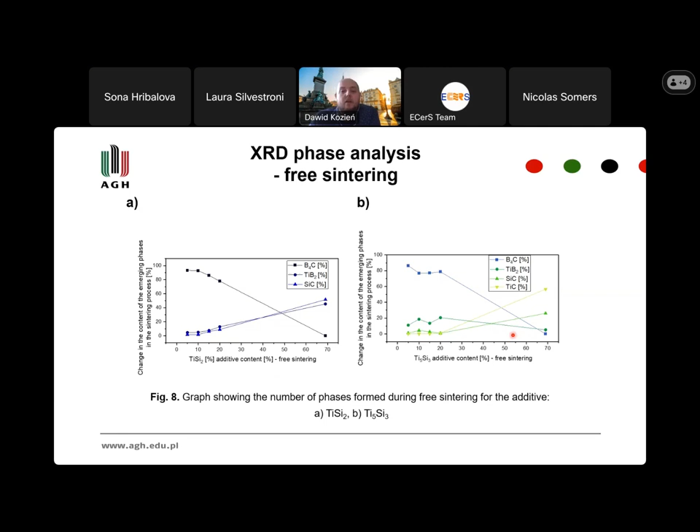Of course, with this free method we can see this, but the main problem is that everybody says SPS is a very fast method to get quick results, but with this method we have more problems.

It's similar in that we can change the temperature of the synthesis, starting close to 1100 Celsius degrees to 1200 Celsius degrees. After that, it's not as stable as the two earlier methods like free sintering and HP method.

And for that reason, the temperature is of course lower than typical. In free sintering it was 1650 Celsius degrees. Compared to the SPS method, it's less by about 400 Celsius degrees, but still we have the point that it's not very good homogeneous.

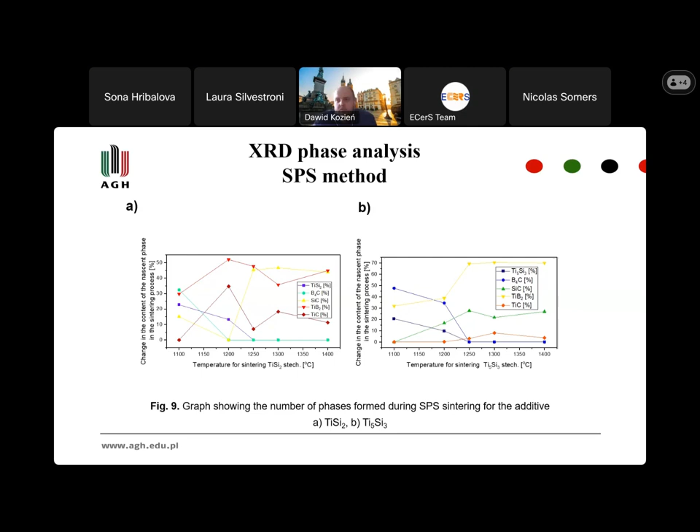So sometimes the method is very fast, but it's a problem with the homogeneity of the whole composite. It's only a difference of about 1 or 2%, but still you can obtain something in your samples.

Here we have some properties of the obtained material from different additives of intermetallic. We can see the results of physical and mechanical properties for the obtained composite, comparing to the results for given methods.

The above graph shows that for the additive in the form of titanium disilicide, we have high results of both density as well as hardness, and Young's modulus are observed.

So it's quite good. We have better densification. We have a better composite after the sintering. The same situation for

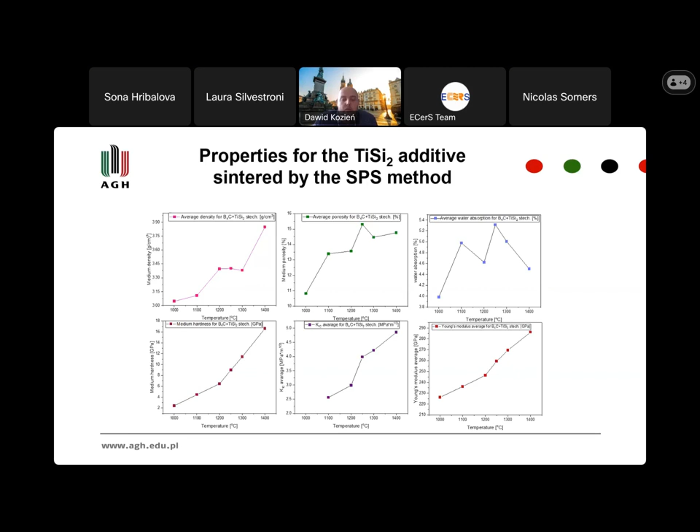another additive of intermetallic, but it could be more problematic to compare these two intermetallics. It's better to add titanium disilicide, with the lowest temperature of the synthesis.

And now to compare, after the synthesis we obtain completely different composites after the sintering. When we use titanium disilicide, we have only titanium diboride with silicon carbide and residual intermetallic.

And when we use Ti5Si3, we obtain a composite with titanium diboride, titanium carbide, silicon carbide, and less than 1% of the intermetallic.

So you can see how we can change, how we can predict before the sintering the phase composition of our obtained composite, how we change the temperature of the synthesis, since typical boron carbide sintering starts close to 1700 Celsius degrees. Now we can lower the temperature with different methods and different additives of intermetallic.

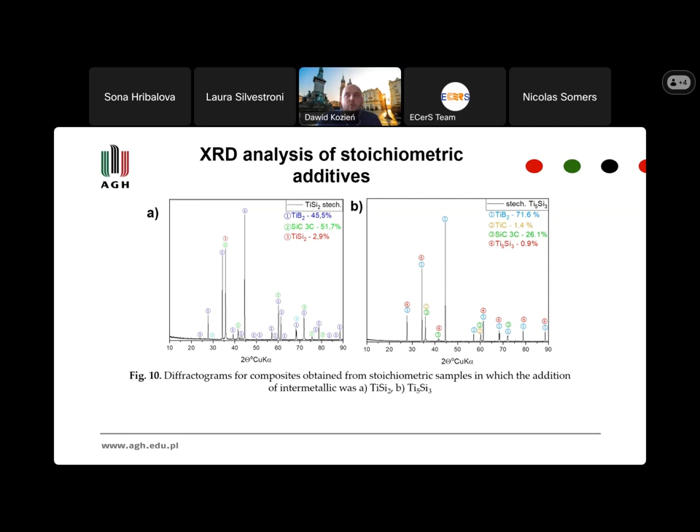And even if you want to obtain a completely new composite, in the SPS method we can change the temperature to 1250 Celsius degrees. This is quite good for us because now we want to save energy and save the cost of production, and we can still grow some temperature to have better homogeneity.

After that, we check the microstructure. We can see that we have a worse microstructure with methods like free sintering, with more porosity, obviously because some carbon from the boron carbide is removed as carbon dioxide. In the HP method, we have a better microstructure, and the same situation with the SPS method.

But in the SPS method, you can see something like that, because that was very fast sintering. So sometimes we have residual intermetallic and different composition in this part, not as homogeneous as in the HP method, but we have a lot of liquid phase during sintering, and a lot of pores like in typical free sintering, comparing the SEM images we obtained.

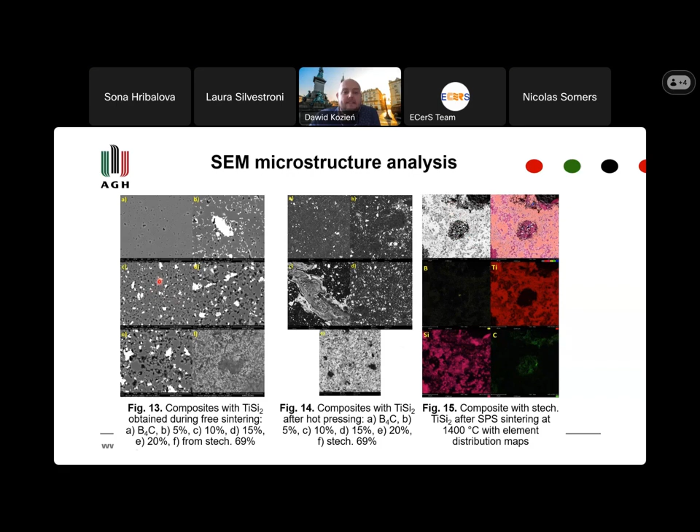And of course, we have some publications on this. So maybe to conclude this part of my work: due to the presence of the liquid phase from the intermetallic material, it is possible to lower the synthesis temperature from 2000 to 1650 Celsius degrees compared to typical free sintering. The titanium carbide phase is formed only when no free boron is present in the system during sintering.

The microstructure and mechanical properties of our obtained composite ceramic can be effectively tuned by regulating the combination of the starting precursors used, particularly through the use of various intermetallics from the Ti-Si system.

Both additives tend to be characterized by similar hardness values to each other. A higher hardness is obtained with the addition of intermetallic titanium disilicide, which is obvious because we have more silicon carbide. In relation to the addition of Ti5Si3, this is associated with obtaining more silicon carbide, which has higher hardness than titanium diboride.

So before starting sintering, you can think about the composite and what you want, and where you want to use these composites, in which application. So you can control the phase after sintering, and you can control the proportion of ceramic phase in the composite after sintering.

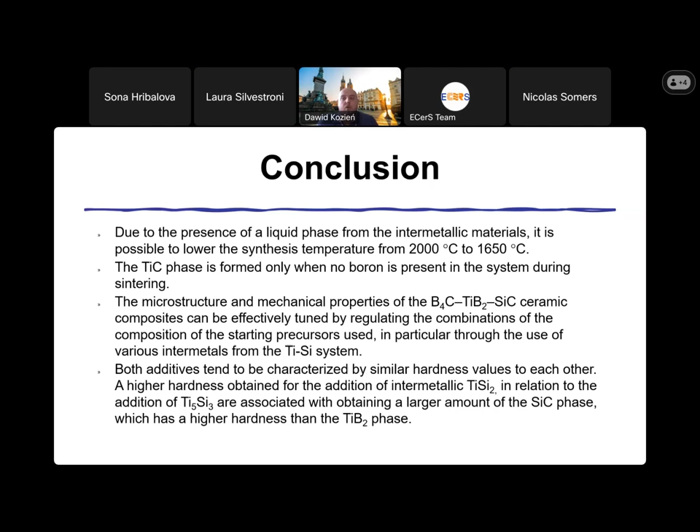It's very good to think about why you want to obtain this composite and for which application, because now we do a lot of experiments and just want to say we obtained something. But in my opinion, the best option is to think about why you want to obtain something or what you want to do with this material. Now I can show you a comparison of what I did during my JECS Trust mobility.

I was very thankful that I obtained this JECS Trust mobility, where I spent 2 months in different institutions. One month was in the Czech Republic, and the second month I spent in Slovakia in the group under Peter Tatarko in Bratislava.

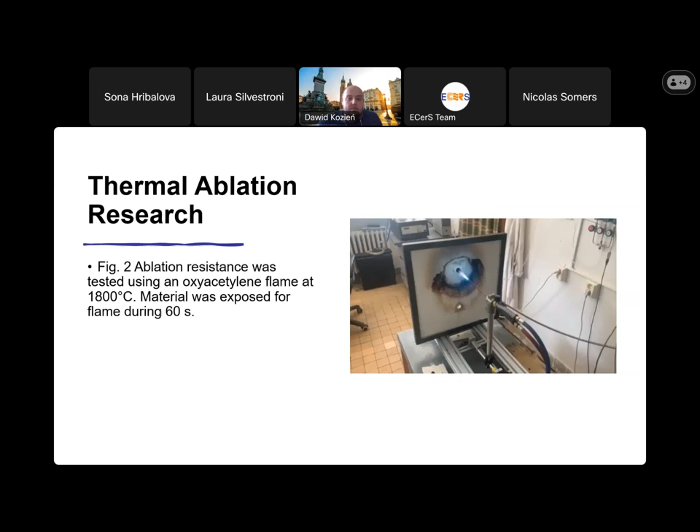After that, I can show that we checked the ablation research test using an oxyacetylene flame at 1800 Celsius degrees, and the material was exposed to the flame for 60 seconds. We prepared the composite and wanted to see how it looks after this method. To compare, you can see how typical boron carbide looks after this, cracking at a temperature of about 1600 to 1700 Celsius degrees.

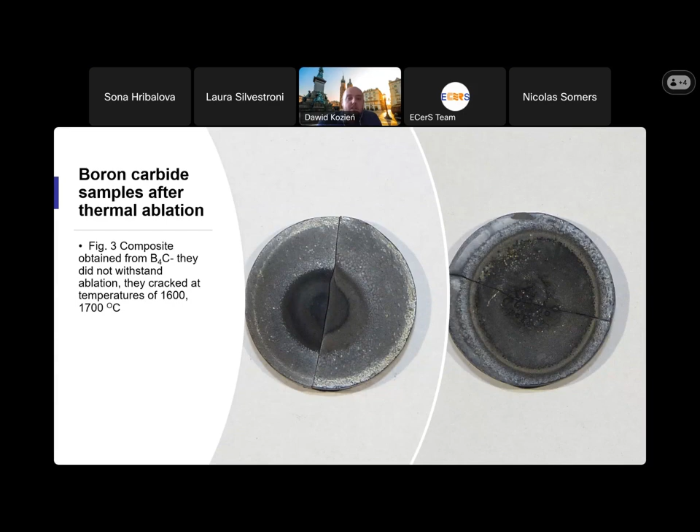When we use intermetallic additives like Ti5Si3, we can see that it changed the structure a little bit, but we have a problem—it was not so good. The same with titanium disilicide.

But of course, we analyze everything—the surface, how it's influenced. Now we can present the result of one material. It was prepared during my JECS Trust mobility; nothing happened on the surface during this ablation test. Now we can assume whether it's a success or not, which of course is always the question.

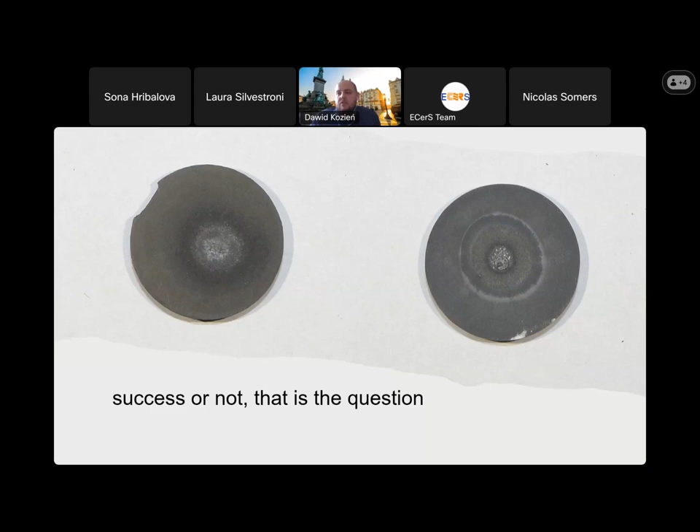To summarize, the composite and the thermal resistance are influenced by intermetallic additives, which allow lowering the synthesis temperature and the thermal diffusion. The obtained composite shows higher thermal resistance than commercially available material or composite obtained from pure boron carbide.

When intermetallics are used, even from the same system for both Ti-Si and Ti-Al, a significant difference can be observed after the ablation test. But it's also possible to obtain composites from each system that are resistant at 1800 Celsius degrees. So we can obtain from each system and calculate the phase after the sintering.

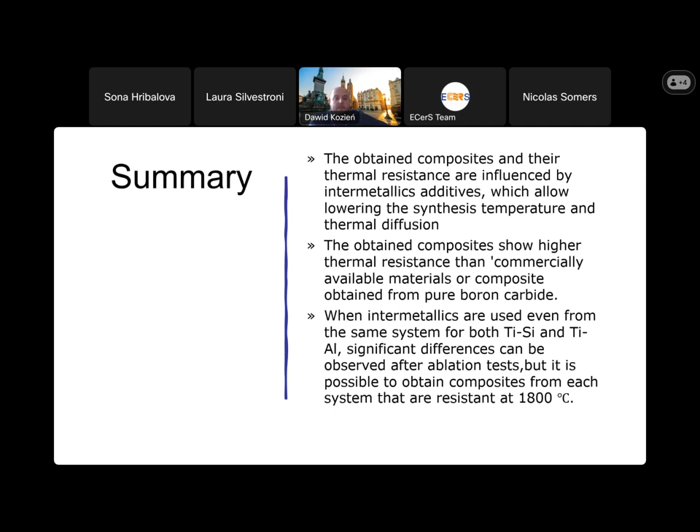Now we exactly know how to calculate this, how to obtain good materials for the application—for aerospace applications, for gas turbine applications.

And now I want to thank you, because during all my journey of the PhD, and now after I stayed at the university, I had great opportunity to have a lot of internships and met a lot of great people who helped me during all this research. Of course, they gave me a lot of knowledge.

And now, to summarize, even now as I'm presenting to you on the webinar, I'm staying at CERAMS in France, where we are working on 3D printing by robocasting of this material, using it in applications where we can 3D print elements that may be used in the future in aerospace.

So what I can offer from my knowledge and research: the first thing is, when you try to do something and prepare materials, just think about where you want to use them. And even during your career and research, if you think it's not possible to use in this application, you can find another application. Never give up—I had a lot of times during my PhD when I didn't want to continue my research work. So the only thing to do is: let's do it, do what you want, and have fun with your research. Thank you.